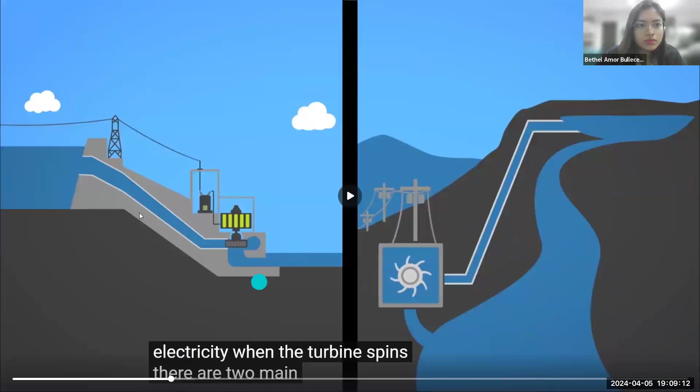Engineer Buliser, does this video have audio? I will let you know.

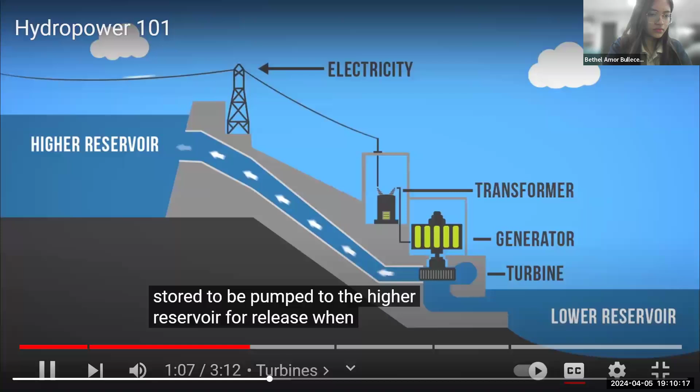Types of hydroelectricity production: dams and run-of-river. Hydro dams utilize the potential energy from dammed water to produce electricity. A dam is a large barrier constructed to raise the level of water and control its flow. The elevation created by the dam creates gravitational force for turning the turbine when water is released. Some dams also contain an additional reservoir at their base where water is stored to be pumped to the higher reservoir for release when electricity is in demand.

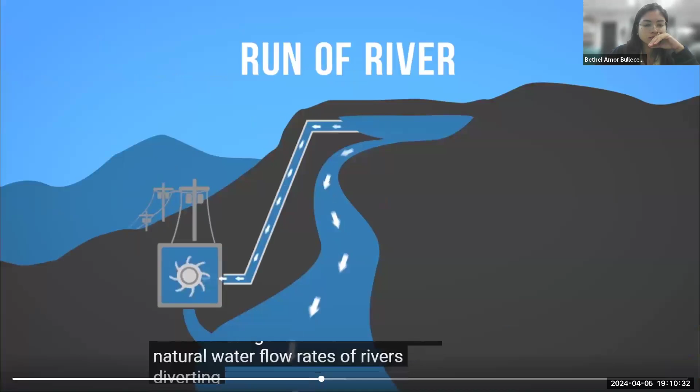This is referred to as pumped storage hydro. The second form of hydroelectricity production is run-of-river hydro. Run-of-river still uses turbines and generators, but relies on natural water flow rates of rivers, diverting just a portion of the water through turbines. Because run-of-river hydro is subject to natural water variability, it is more intermittent than dammed hydro.

There are various sizes of hydro plants that produce electricity: large hydro, greater than 30 megawatts; small hydro, 100 kilowatts to 30 megawatts; and micro hydro, less than 100 kilowatts. The Hoover Dam in the United States is a whopping 2,074 megawatts, which is enough to serve 1.3 million people. Of all renewable energy sources, hydropower holds the largest share of worldwide electricity production.

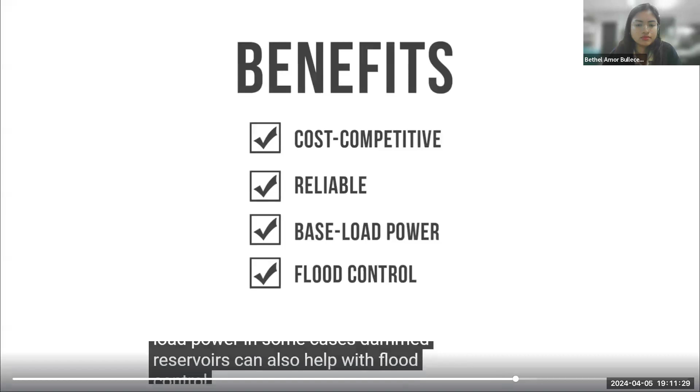Hydropower has several benefits. It is a cost-competitive form of electricity, even though the initial building cost can be high. It is quite reliable compared to other renewable options and pairs well with other sources as it can be used as baseload power. In some cases, dammed reservoirs can also help with flood control and be a reliable water supply for communities. There are also some concerns with hydropower, especially when it comes to large dams.

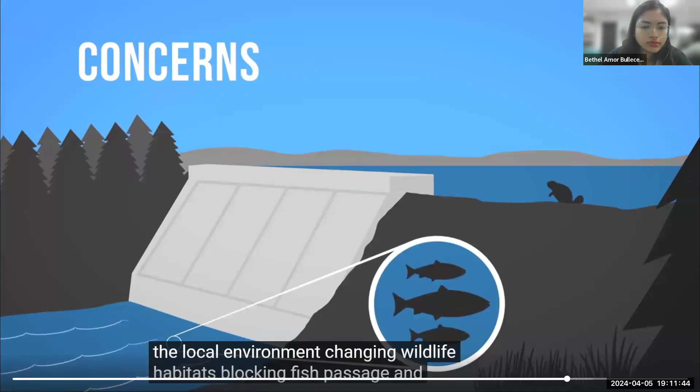Damming a river has a major impact on the local environment, changing wildlife habitats, blocking fish passage, and often forcing people in riverside communities to move out of their homes. In addition, dam failures can be catastrophic, claiming the lives of those living downstream. Hydro plants are also not completely free of greenhouse gas emissions. As with most forms of energy, carbon dioxide emissions happen during construction, particularly due to the large quantities of cement used, and plant matter in the flooded areas makes methane, another greenhouse gas, as it decays underwater.

That's hydropower. So that is the overview about hydroelectric power. So how do we get energy from water?

Hydropower or hydroelectric power is a renewable source of energy that generates power by using a dam or diversion structure to alter the natural flow of a river or body of water. Hydropower relies on the endless, constant recharging system of the water cycle to produce electricity, using water as the fuel, which is not reduced or eliminated in the process.

There are many types of hydropower facilities, though they are all powered by the kinetic energy of the flowing water as it moves downstream. Hydropower utilizes turbines and generators to convert that kinetic energy into electricity, which is then fed into the electric grid to power homes, businesses, and industries.

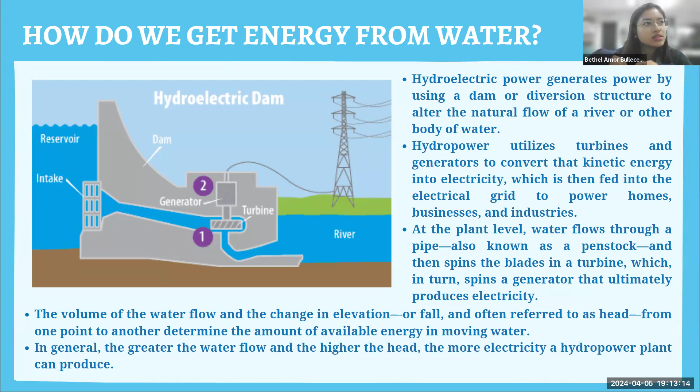Next, I'll be showing you the history of hydroelectric power. Hydropower is a type of renewable energy. It has a long history.

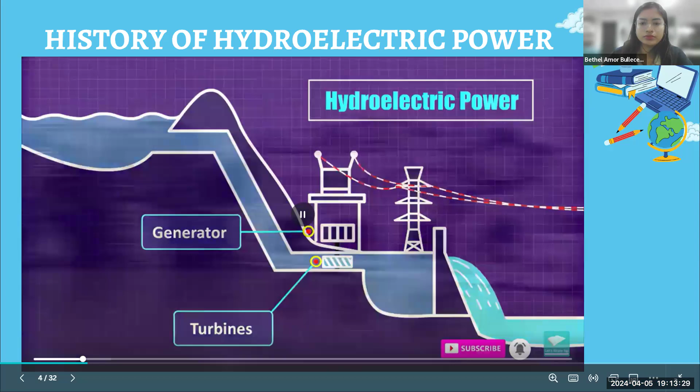Since the early ages, water wheels have helped humans do several works like irrigating crops and grinding grains. Also, it brought revolutionary improvement in paper mills, textile mills, and metallurgy plants.

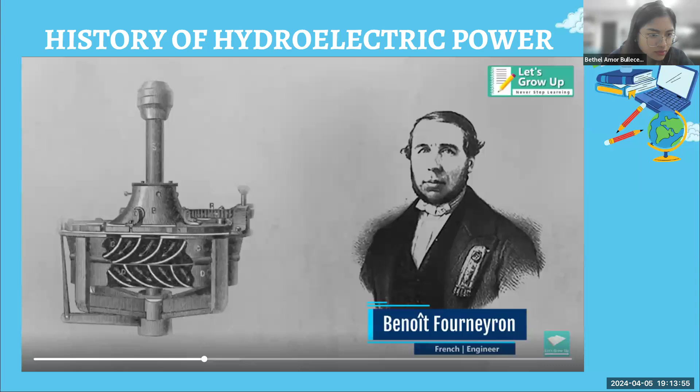Later, the water wheels were replaced by smaller, cheaper, and more efficient water turbines when the French engineer Benoit Fourneyron introduced the first model in 1827. This was the first design of a reaction turbine capable of generating 6 horsepower, or 4.5 kilowatts, with 2 sets of blades arched in opposite directions.

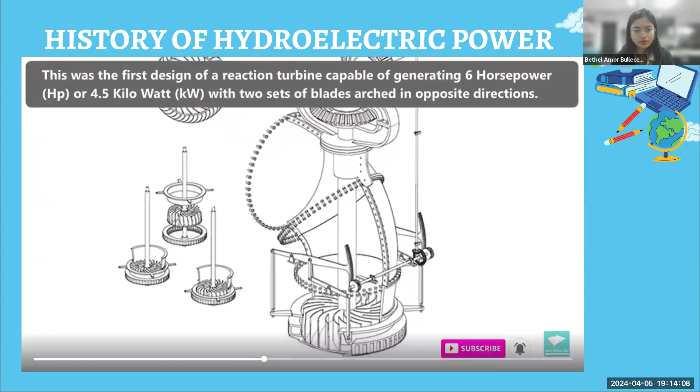Probably the most important year in hydropower history was 1831, when the first electric generator was invented by Michael Faraday. This laid the foundation for us.

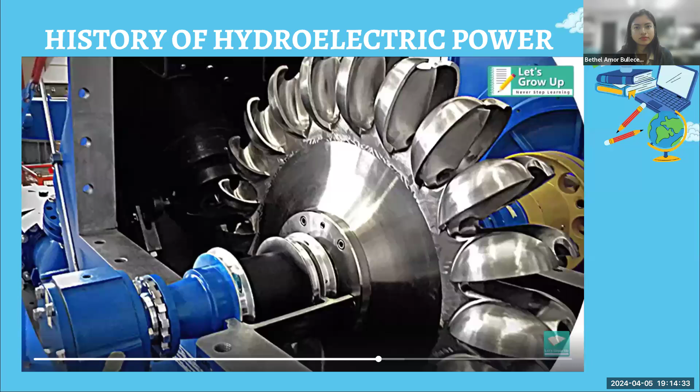After Fourneyron, James Francis created the modern water turbine in 1849. It was called the Francis turbine, and it is the most widely used water turbine till today. The first impulse turbine was created in the 1870s by an American engineer named Lester Allen Pelton. It was named the Pelton wheel after it was patented in 1880.

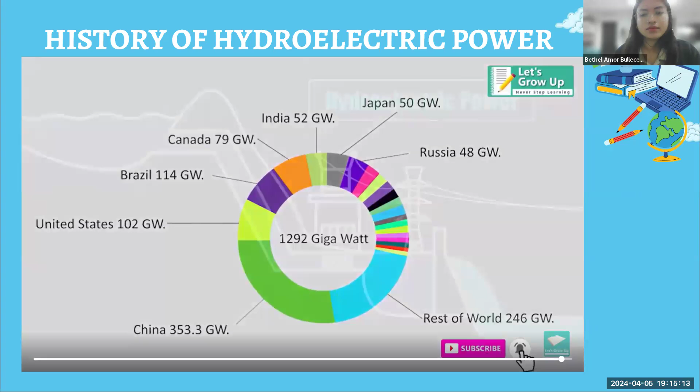The world's first hydroelectric power plant was established in Appleton, Wisconsin, United States, along the Fox River in 1882. After that, over the next century, numerous hydroelectric projects developed all over the world. Currently, the total installed capacity globally is 1292 gigawatts, with China having the highest capacity at 353.3 gigawatts, followed by Brazil at 114 gigawatts. That sums up the history of hydroelectric power.

The water flows through a pipe, which is a penstock. It comes from the intake, where the water enters. Then it flows through the penstock, which creates kinetic energy that drives our turbine. The turbine spins the generator that ultimately produces electricity. So as we've seen, the turbine is connected to the generator, then the transformer, and onward to the transmission line.

So at the plant level, this is the way for the HEPP, or hydroelectric power plant, to generate electricity. Most conventional hydroelectric facilities operate this way, including run-of-the-river systems and pump storage systems.

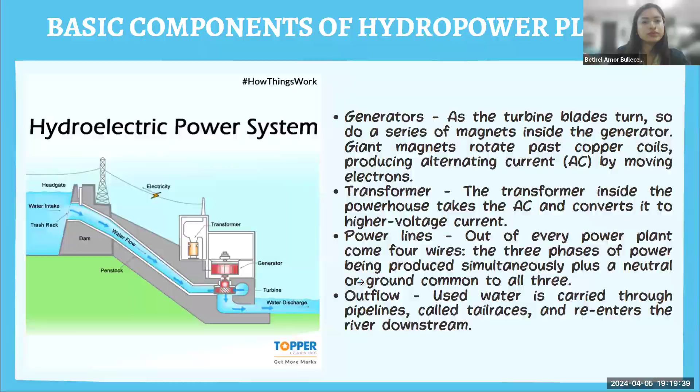Now the different types of water turbines: we have the Francis, the Pelton, and the Kaplan. It depends on the level of the head - the head is usually measured from the turbine up to the water surface of the reservoir. It depends on the distance of the head and also the diameter.

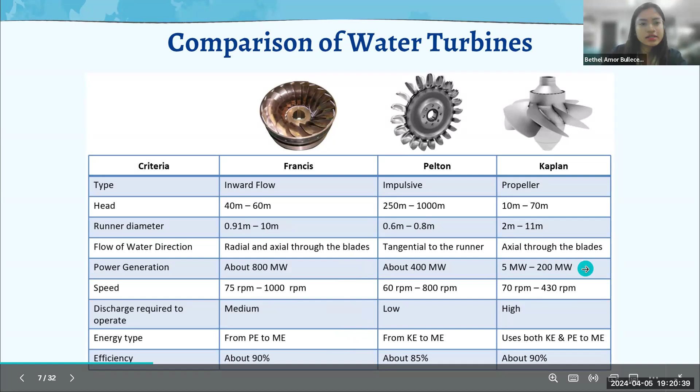For the Francis turbine, flow is radial and axial through the blades. The Pelton is tangential to the runner, and the Kaplan is axial through the blades. It also depends on the power generation, and the speed varies. Efficiency also differs by type - the most efficient are the Francis and the Kaplan, with a percentage of 90%.

Next, we have the classifications of hydroelectric power plants. The hydroelectric power plant is classified by 4 different categories: availability of water flow, water head, major load, and lastly, installed capacity. Under availability of water flow, we have run-of-river without storage, where the flowing water is directly fed to the turbines and the water is not stored.

So generating capacity only depends on the rate of flow of the water, and the plant is placed where there is connectivity directly to the river. So sa river siya gikan. So during rainy season, some water may go to waste due to high flow rate, while during dry season, generating capacity will be low due to low runoff periods or low flow rate. So dili siya, pagka-intermittent gyud.

Then next is the run-of-river with pondage. So the pond or reservoir allows to store water during off-peak hours and uses it during peak hours. So the usefulness of run-of-river plants is increased by pondage. So ang pondage, it utilizes the river's water for electricity generation, thus wastewater is minimal compared to a plant without pondage. So due to the presence of pondage, tailrace conditions should be such that exit water would not cause flooding.

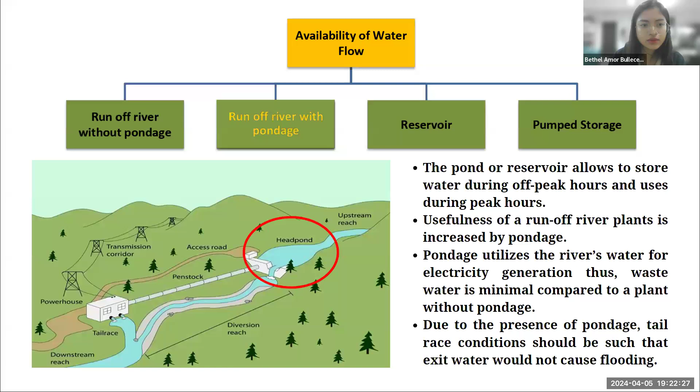So next is ang reservoir. So water is stored behind a dam which is available throughout the year. So it can be used as a base load plant. So usually sa Philippines, inani usually ang atua, and most hydroelectric power plants in the world are reservoir or storage type plants. So the larger the dam or storage facility, the larger its generating capacity. So example siya ang Three Gorges Dam sa China which generates 22,500 megawatts.

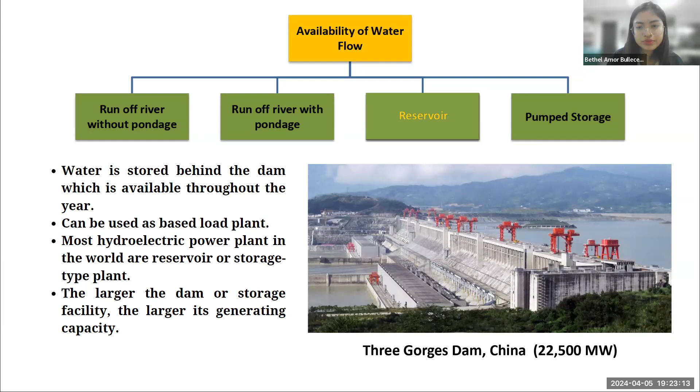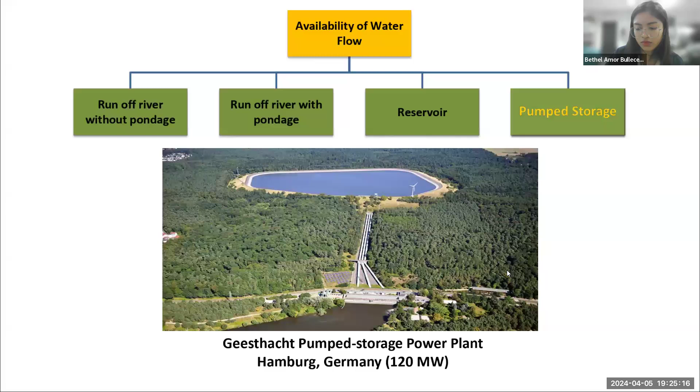So next we have the water head. So the water head we have low, medium, and high. So the low water head has head differences of less than 30 meters. So runoff river systems are generally used on this type of head where no surge tank is required, as the power plant is typically located near the dam. So low head systems transport water in large volume and thus require large diameter and short length of pipes, large turbines, and low-speed generators.

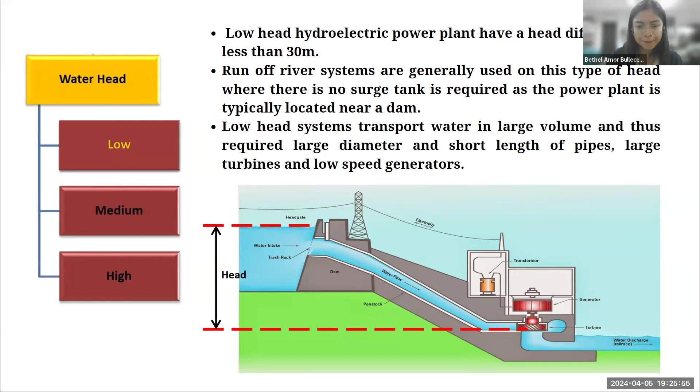Next is the medium water head. So it has a head difference between 30 to 100 meters. So the water is mainly stored in the forebay, which goes to the turbine through the penstock. Then the forebay serves as a surge tank where the water is usually carried in an open channel from the main reservoir.

Then we have the high water head. So 100 meters and above ang head. High head systems transport water at smaller volume from a high elevation reservoir and thus require small diameter with long length of penstock, smaller turbines, and high-speed generators. So a surge tank may be needed on this type of head to serve as a ready reservoir in case of sudden change in demand and reduce the severity of the water hammer effect on the penstock. So generally, the large hydroelectric power plants are either medium or high head.

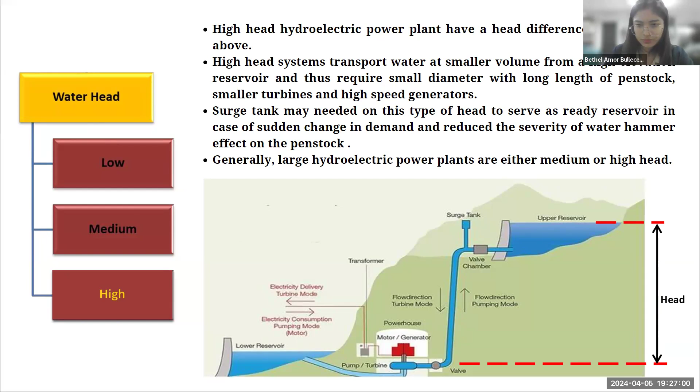So we have two natures of load, the base and the peak. So the base provides continuous supply of electricity throughout the year with some minimum power generation requirement. Due to the low generation cost of hydroelectric power plants, they are generally considered as must-run units. So hydroelectric power plants with continuous flow of water or a large storage can be used as base load plants.

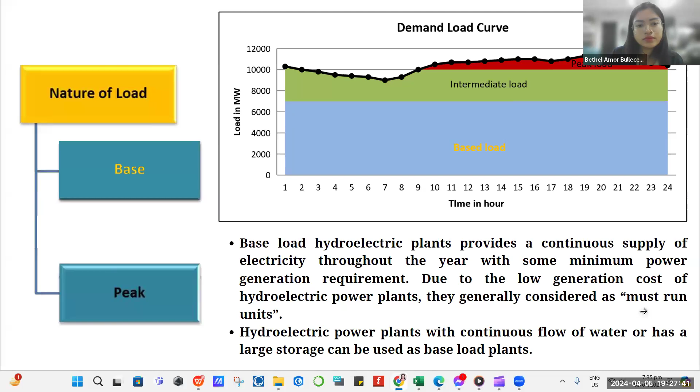Next we have the peak. Peak load hydroelectric plants are used to supply the grid during peak hours, only during peak hours, or the top portion of the load curve. So that's the peak load, only at certain hours, a certain time when the demand for electricity is at peak. But the base load is the demand over the 24 hours, the electricity we need within the 24 hours. It's continuous, not intermittent.

So run-of-river plants with pondage and pumped storage type can be considered as peak load plants, like the pump storage earlier. Usually peak load plants have higher generation cost compared to base load plants.

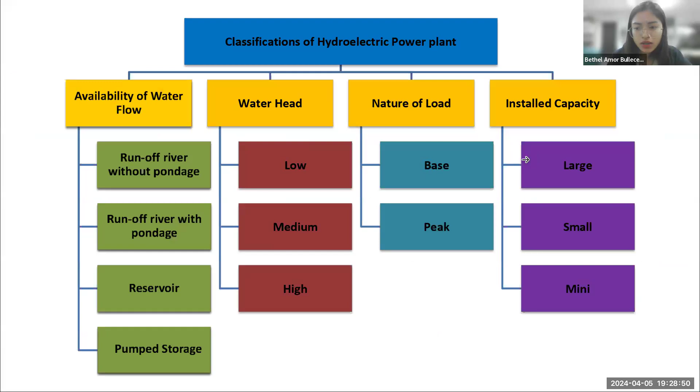Next we have installed capacity. We have large, small, and mini. For the large capacity, exceeding 100 megawatts in plant capacity and usually feeding into a large grid. Next we have small, typically ranging from 15 to 100 megawatts in plant capacity and usually feeding into a subgrid. They are usually called embedded generators.

And lastly, the mini has a plant capacity of 100 kilowatts to below 15 megawatts and usually feeds into a subgrid or isolated grid. It provides electricity to small communities or remote areas away from the grid. They are usually called distributed energy resources.

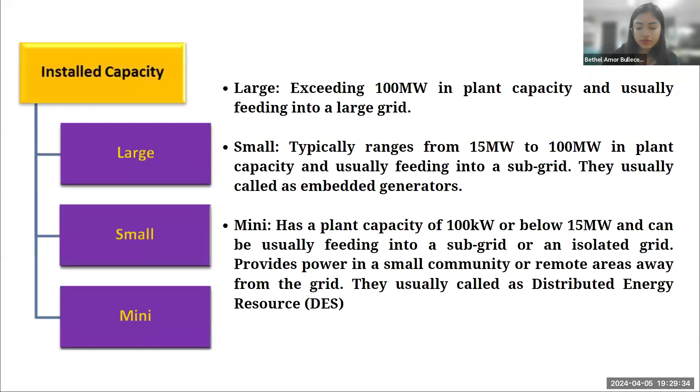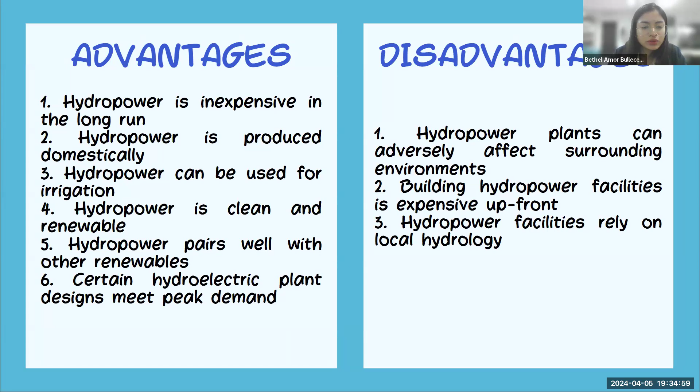So here are some of the hydroelectric technologies. There are many of them now, but I will just show you three.

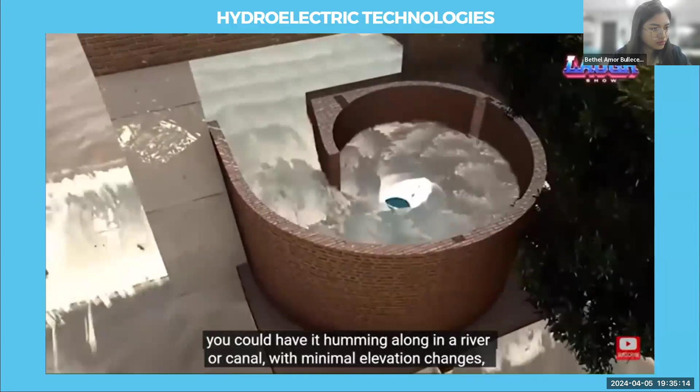Belgian company, shaking up the hydroelectric power scene. Their game-changing turbulent turbine, a marvel of modern design, is more affordable and economical than traditional powerhouses. Just picture it. You could have it humming along in a river or canal with minimal elevation changes in a week's time. Day or night, rain or shine, it's generating electricity for you.

Here's how it works. This smart turbine creates a swirling vortex in a concrete basin, turning water flow into spinning energy. Depending on the water's flow rate, it can generate up to a whopping 70 kilowatts. Enough juice to power 6 or 7 households. And the best part, it's environmentally friendly. The design ensures our aquatic friends remain unharmed, and its impressive lifespan extends beyond 100 years. Truly, a step forward in renewable energy.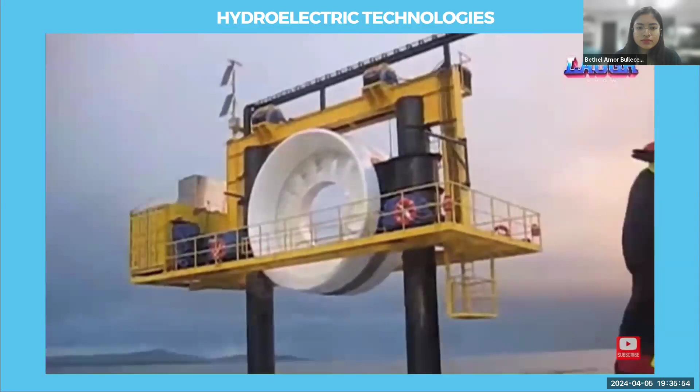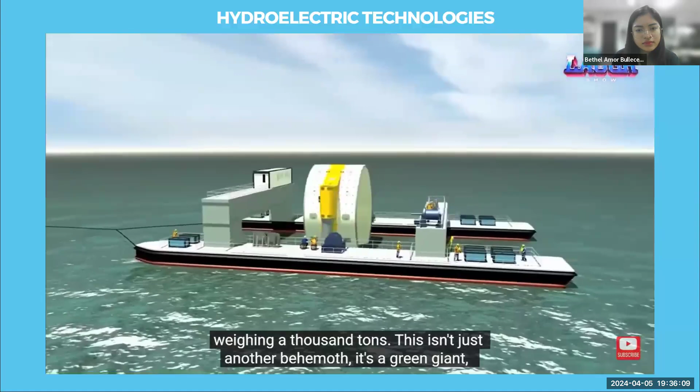Open Hydro. Continuing our journey into renewable energy, gentlemen, we set sail to Open Hydro, North America's largest tidal power plant off Canada's coast. Imagine a structure towering 5 stories high, weighing 1,000 tons. This isn't just another behemoth, it's a green giant, generating a staggering 16 megawatts of electricity, enough to power a small town. This marvel of engineering is the product of Irish company Open Hydro and Canada's Emera, and it's been harnessing the power of the sea since November 2016.

Now, get this. Open Hydro features 2 turbines, each 53 meters in diameter, anchored by cables a solid 120 meters long. This means, from turbulence vortex to Open Hydro's tidal prowess, we can power about 1,000 homes without emitting a trace of greenhouse gas.

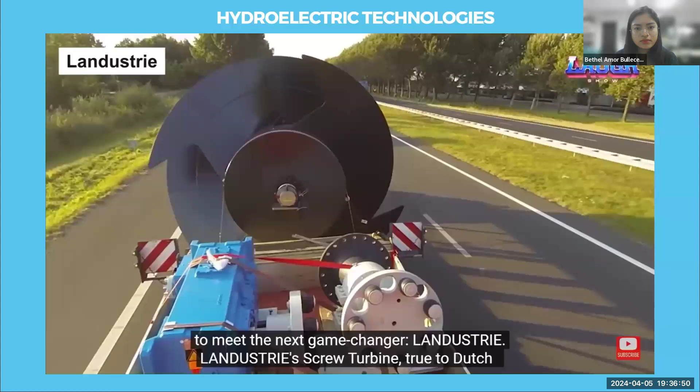Landustrie. Now, we journey to the Netherlands to meet the next game changer, Landustrie. Landustrie Screw Turbine, true to Dutch expertise in water management, turns canal height differences into electricity. It's a marvel, generating power from just a 1 meter height difference and a water flow of 500 liters per second. Just like its predecessors, the Landustrie Screw Turbine is compact, easy to install, and kind to your wallet with its low maintenance costs. It's resilient, withstanding harsh canal conditions and ice while ensuring the safety of our aquatic friends.

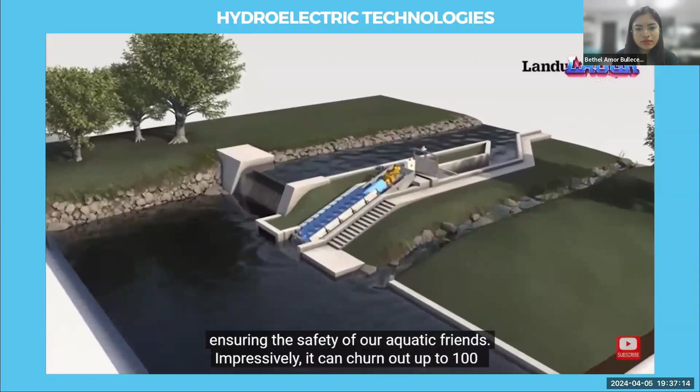Impressively, it can churn out up to 100 kilowatts of electricity continuously and remains a reliable source of energy even during periods of low water flow. Best of all, it's a zero-emission solution.

So those are just some of the technologies invented by the researchers and engineers in the different parts of the world. So we have cumulative hydropower capacity worldwide. In 2022, these are the major countries that have contributed to the hydropower capacity. We have China as the highest. China generates 414.8 gigawatts of hydroelectricity, followed by Brazil, which is 109.8 gigawatts.

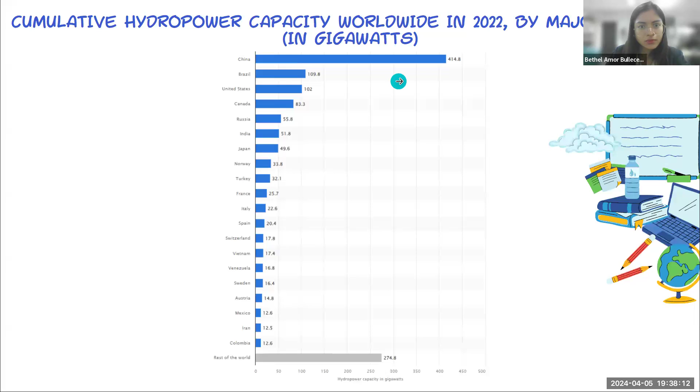So Philippines energy mix by 2022. Luzon has 6.6% of gross generation from hydroelectric, while Visayas has 0.24% share of hydroelectric generation, and Mindanao has 31.07% hydroelectricity generation. So Mindanao is really big, we have lots of hydroelectricity generation. So overall, in the Philippines, the energy percent share for hydroelectricity is 9.04%.

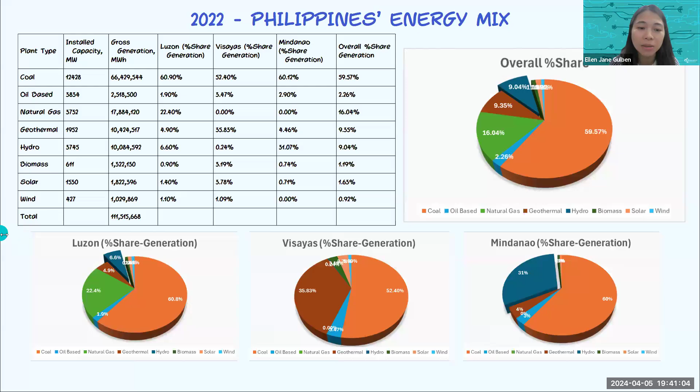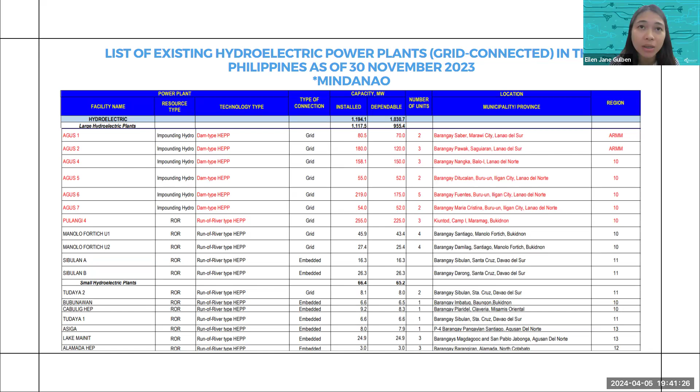So, we are considering them as base load or a must-run unit, as what our presenter has said earlier. It's a must-run unit since it's very cheap type of electricity. So we considered it as base load, and since it is base load because it provides stable supply. If it says that it will provide you 65 megawatts, it will provide you 65 megawatts.

Unlike solar that depends on the sun, which is erratic because it is dependent on weather conditions. So we can't get the amount, the peak load that solar can provide. Unlike our hydro. So it is considered base load. But hydro's generation unit is also able to follow peak load demands, since its ramping is fast.

So if you want an additional 10 megawatts in at least 5 minutes, the hydropower plant can provide you that, or if you want it lowered, they can also lower down their generation. So it can be considered a peak load power plant. So it can be base load, it can be peak load.

So, for those who were in my undergrad class, you have your laboratory 1, which is load profiling. You have 3 types or 3 categories of loading in your power plant. Please, you can resubmit your laboratory 1. Find power plants that are base load, intermediate, and peak load power plants. So you may resubmit your laboratory 1, class.

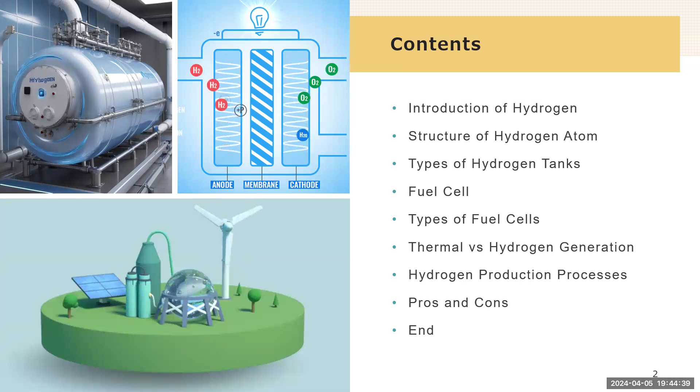So for the discovery of hydrogen, in 1766, Henry Cavendish was the first to recognize hydrogen gas as a discrete substance by identifying the gas from metal acid reaction as flammable air. Then in 1781, he was the first person to find that the gas produces water when burned, and this was a key experiment in disproving the Aristotelian theory of the four elements.

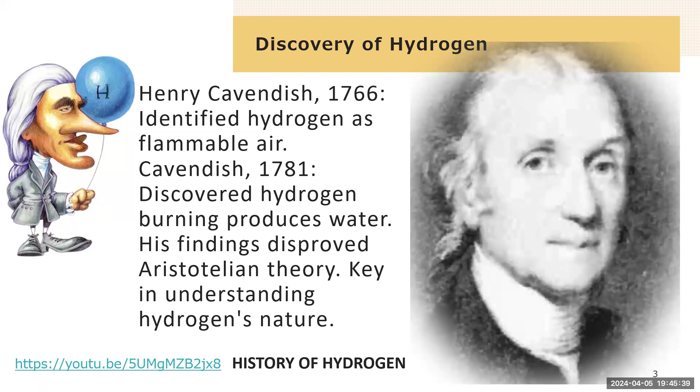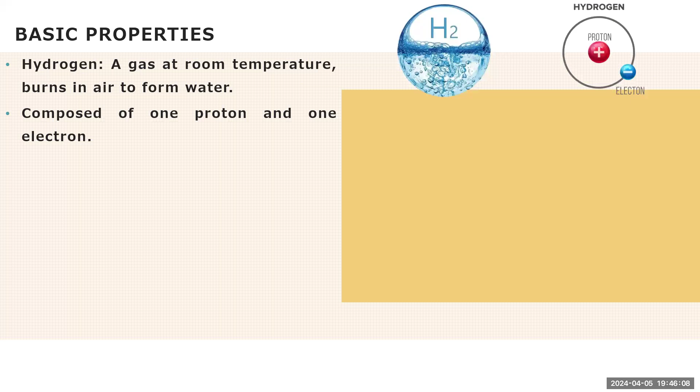So for the basic properties, hydrogen is a chemical element that exists as a gas at room temperature. When hydrogen gas burns in air, it forms water, and hydrogen gas has the smallest atoms of any element, and a hydrogen atom contains only one proton and one electron. So the proton is the center or nucleus of the hydrogen atom, and the electron travels around the nucleus.

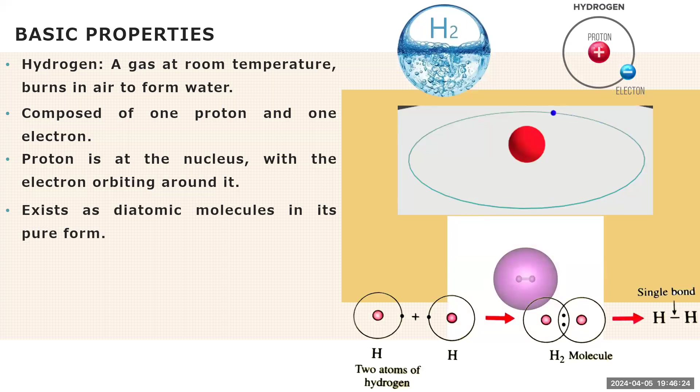And pure hydrogen exists as a hydrogen gas, in which pairs of hydrogen atoms bond together to make molecules, and hydrogen is the first element in the periodic table with the atomic mass and atomic number of 1. So hydrogen, which has the chemical symbol of H, is the smallest and most common element in the universe.

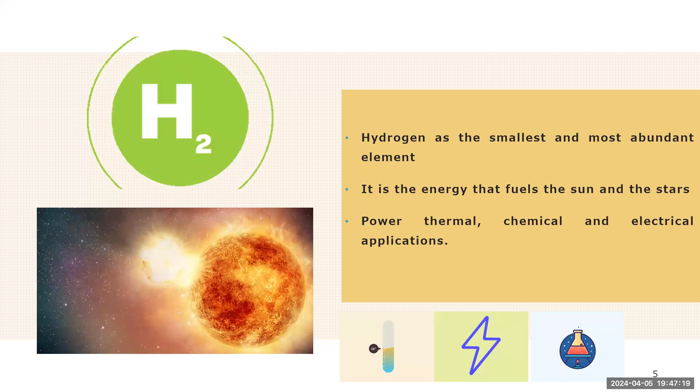It is the energy that fuels the sun and the stars, and hydrogen is a versatile energy carrier. So you can power almost anything with hydrogen with numerous thermal, chemical, and electrical applications. In contrast to some other forms of energy such as solar or wind, it's not all about harnessing what's already there. The challenge of hydrogen is we need to make hydrogen energy.

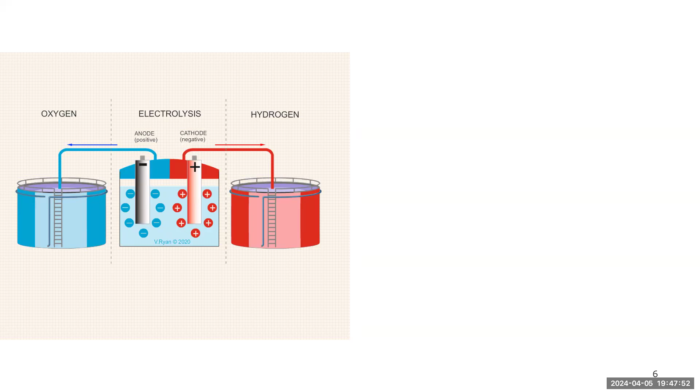So hydrogen can be produced from a variety of resources. One method is electrolysis, the process of passing an electrical current through water, H2O, to split it into its separate hydrogen and oxygen atoms. After the hydrogen gas has been separated from oxygen gas, it is purified to remove traces of oxygen and water, and it is then compressed and safely stored. The separated oxygen is typically released into the atmosphere or captured and stored for further uses.

So, types of hydrogen tanks. The use of hydrogen as a fuel source is becoming increasingly popular. So as we shift towards renewable energy sources, the safe and efficient storage of hydrogen is a major challenge. As it needs to be stored under high pressure, we will explore the different types of tanks used to store hydrogen under pressure.

So there are 5 types of gas tanks that can be used for both stationary and mobile applications to store hydrogen. For type 1, this is the most common gas tank, which is a simple cylinder made of steel. The operating pressure is from 200 to 300 bar, and it is typically used for industrial applications. The density of such a type 1 storage is around 15 grams per liter.

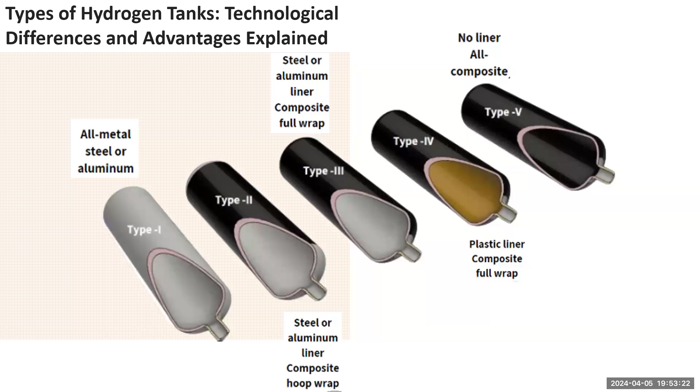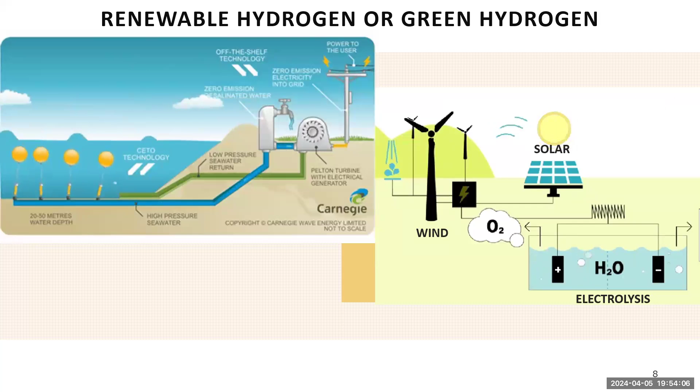Hydrogen produced by electrolysis using renewable energy like solar or wind, as well as sustainable water sources like desalination, is referred to as renewable hydrogen or green hydrogen, as it does not emit greenhouse gases when produced. Hydrogen is the lightest element. It is 14 times lighter than air. Because of its low density, it is difficult to transport as a gas. Instead, it needs to be liquefied or converted into a denser form such as ammonia for transportation.

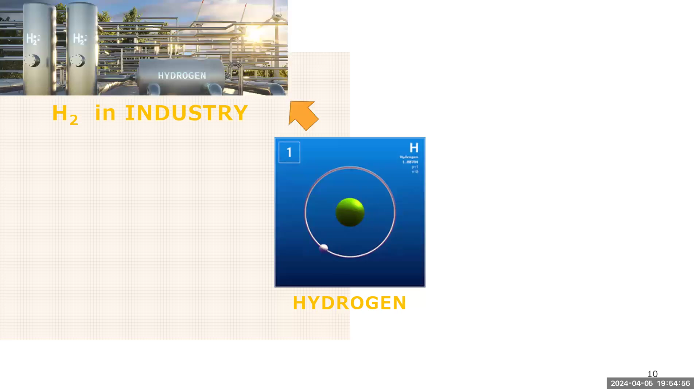So because of its low density, it is difficult to transport as gas, like I said. So it is liquefied or converted to ammonia, and after that, it can be transported. Hydrogen is one of the oldest and most commonly used gases in industry and manufacturing globally. It can be used to fuel ships or heavy vehicles like trucks and buses, or as raw material for production of manufactured products like fertilizers and steel.

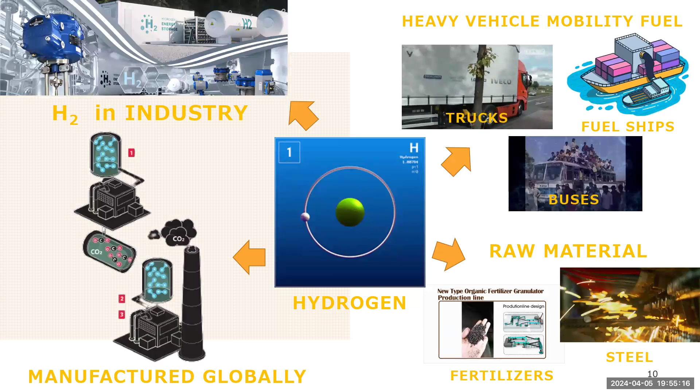In the electrical circuit, the electrons released at the anode flow through an external circuit, creating an electrical current, and a proton exchange membrane allows protons to pass through while blocking electrons, ensuring that the electrical current flows through the external circuit rather than short circuiting within the cell. The oxygen from the surrounding air is supplied to the cathode.

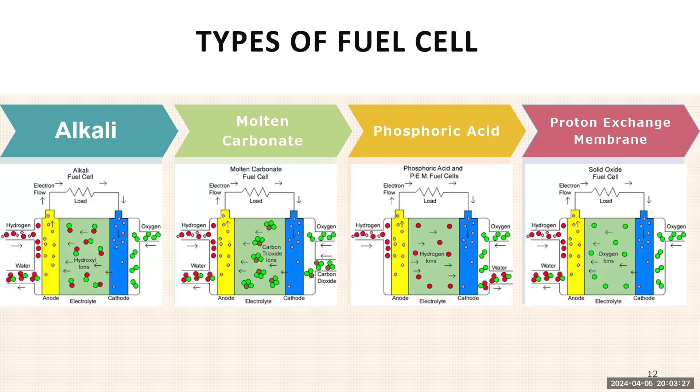For the electrolyte, solid electrolyte or zirconia facilitates ion conduction, and oxygen reduction occurs at the cathode, with oxygen from the air supplied to the cathode.

Next is the comparison of thermal generated energy versus hydrogen energy. For thermal generated energy, the fuel source is diesel or petrol, hydrocarbon-based fuels, and the chemical energy is stored in the hydrocarbon molecules.

Then next is thermal energy, or combustion. The hydrocarbons are burned in an engine, producing heat, and the mechanical energy, or piston energy, is expanding gases moving the pistons. Then next is electric energy, the generator. The mechanical energy drives a generator producing electricity. The thermal generated energy outputs not only electricity, but also noise, carbon dioxide, nitrogen oxides, and fine dust.

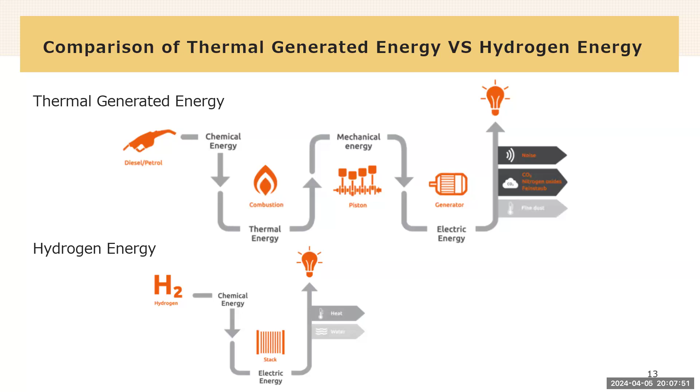For hydrogen production pathways, as for the energy input: ethanol, a renewable alcohol-based fuel; biomass, organic matter used as a renewable energy source; and organic waste, biodegradable materials such as food scraps, yard waste, and sewage sludge.

Next is crude oil, a fossil fuel extracted from underground reservoirs, and natural gas, a fossil fuel primarily composed of methane. The last one is coal, a fossil fuel formed from plant matter over millions of years.

For processing, regardless of the energy input, the reformer process involves feeding the input fuel into a reformer reactor along with steam at high temperature in the presence of a catalyst. The reforming reactions decompose the input fuel into hydrogen gas, carbon monoxide, and carbon dioxide through steam reforming or partial oxidation.

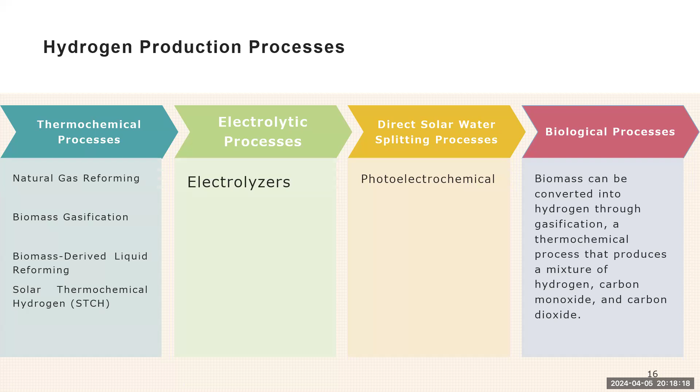For the thermochemical process, natural gas reforming, the pressure swing adsorption or PSA process is based on the phenomenon that under high pressure gases tend to be adsorbed onto solid surfaces, for example, to be absorbed.

Steam methane reforming, or SMR: methane reacts with steam at high temperature to produce carbon monoxide and hydrogen gas. This reaction is the primary method for industrial hydrogen production from natural gas.

Then the water gas shift reaction: in the forward reaction, carbon monoxide reacts with steam to produce carbon dioxide and additionally hydrogen gas.

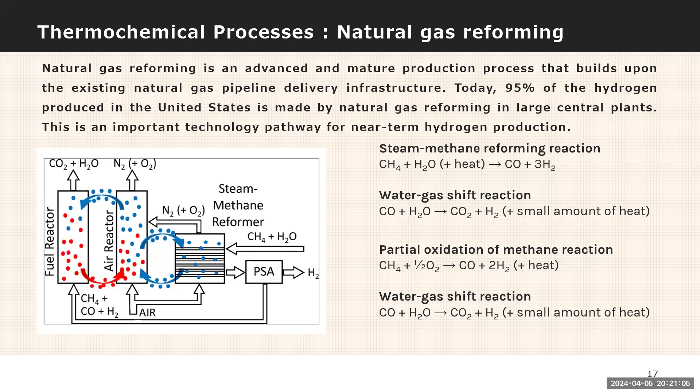The next thermochemical process is biomass gasification, a well-established method that converts biomass into hydrogen and other products through a controlled process involving heat, steam, and oxygen without combustion. A simplified example reaction for biomass gasification involves glucose as a surrogate for cellulose, a major component of biomass.

This reaction demonstrates the conversion of glucose, representing biomass, with oxygen and steam to produce carbon monoxide, carbon dioxide, and hydrogen gas, along with other byproducts.

The water gas shift reaction plays a role in biomass gasification. In this reaction, carbon monoxide reacts with steam to produce carbon dioxide and additionally hydrogen gas, accompanied by a small amount of heat release. This reaction exemplifies the fundamental process involved in biomass gasification, enabling the sustainable production of hydrogen and other valuable products from renewable biomass resources.

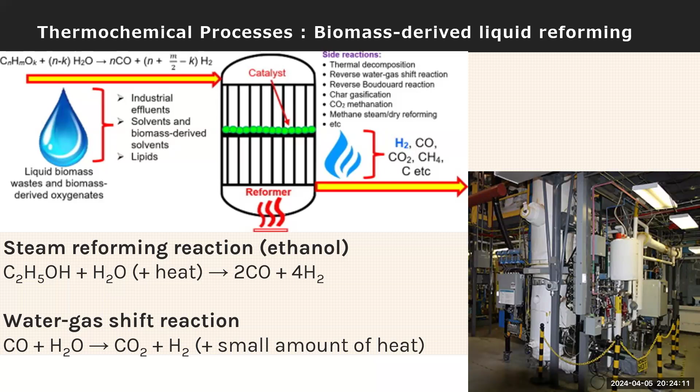Ethanol reacts with steam at high temperature to produce carbon monoxide and hydrogen gas. Then carbon monoxide reacts with steam to form carbon dioxide and additionally hydrogen gas, with a small amount of heat release. These reactions demonstrate how liquids derived from biomass can be reformed to produce hydrogen, offering a renewable and sustainable pathway for hydrogen production.

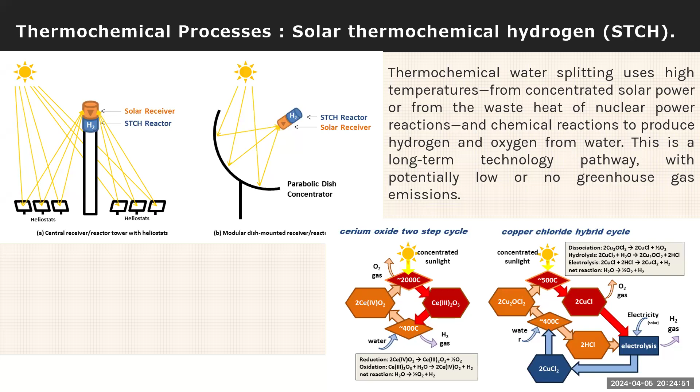Then the thermochemical process of solar thermochemical hydrogen, also known as water splitting, is a technology pathway that utilizes high temperatures sourced from concentrated solar power or the waste heat of nuclear power reactions, along with chemical reactions, to produce hydrogen and oxygen from water. This approach offers a long-term solution for hydrogen production with the potential for low or no greenhouse gas emissions.

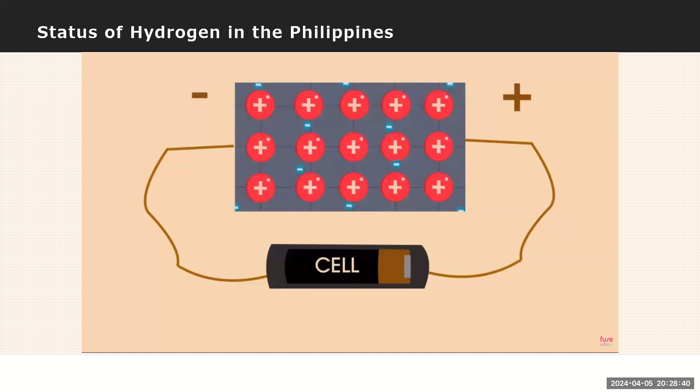Structures, we know that electrons in a metal aren't bound to particular atoms. They form a sea of electrons that can move easily if a potential difference or a voltage is applied across it. This could be from an electrical cell or a battery. The electrons will begin to drift towards the positive terminal of the battery, and this is what happens when current flows. Current is the movement of charge, in this case, electrons.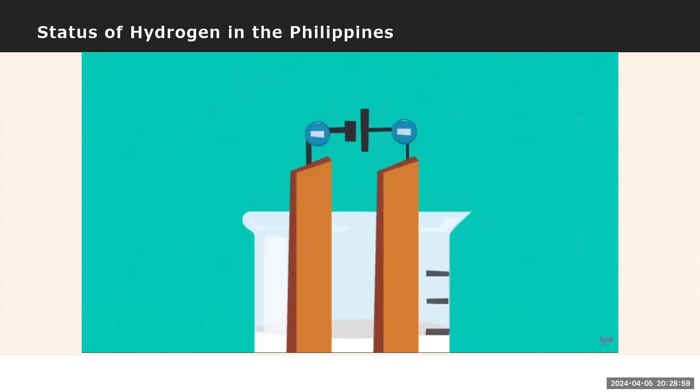Now, let's go back to our molten sodium chloride. We've added our copper wires, let's call them electrodes, and now we'll connect these to an electrical cell. The electrons will start to flow in the wires, and this will cause one electrode to become positively charged and the other negatively charged. This has an immediate knock-on effect in the molten sodium chloride, which you'll remember is a mixture of sodium cations and chloride anions.

Anything positively charged in the liquid, in this case the sodium ions, is going to be attracted to the negative electrode. And anything negatively charged, in this case the chloride ions, is going to be attracted to the positive electrode. This is because opposite electrical charges attract. When the ions meet the electrodes, electron exchange happens. This triggers a chemical reaction.

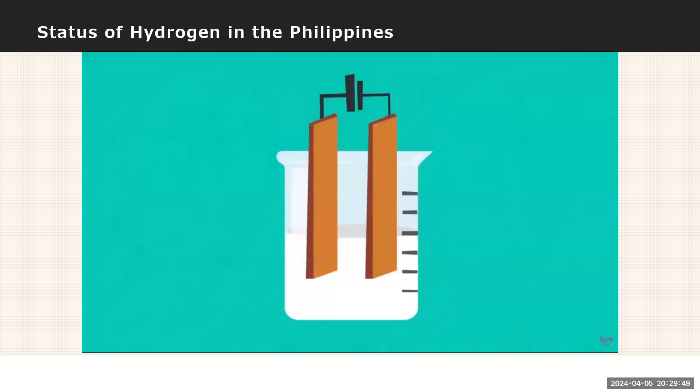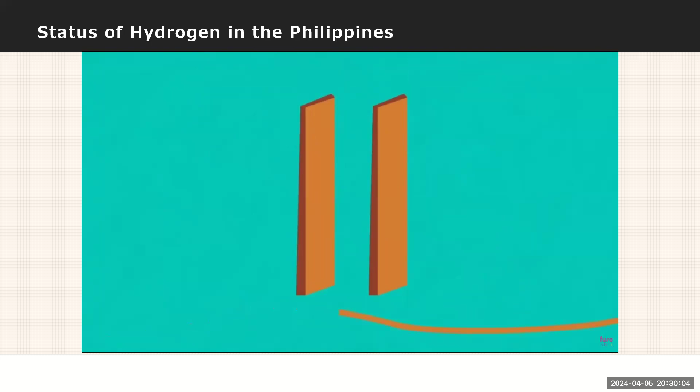Solids can form, gases can be given off, and new solutions can be left behind. It all depends on the liquid and what material the electrodes are made from. There is more detail about this process in our lesson, Interpreting Electrode Equations. There are special names for the electrodes, which are usually metal plates with a larger surface area than a piece of wire. The positive electrode is called the anode. It attracts anions. And the negative electrode is called the cathode.

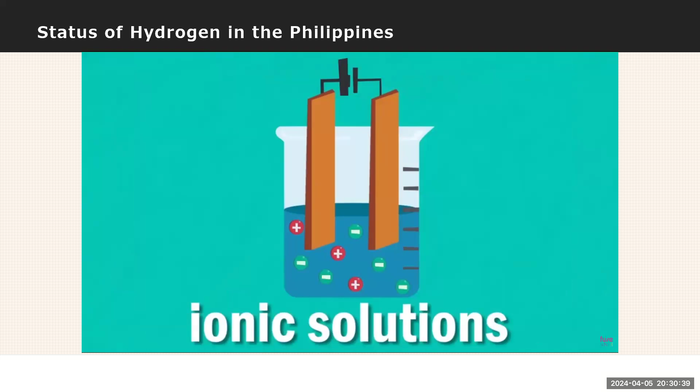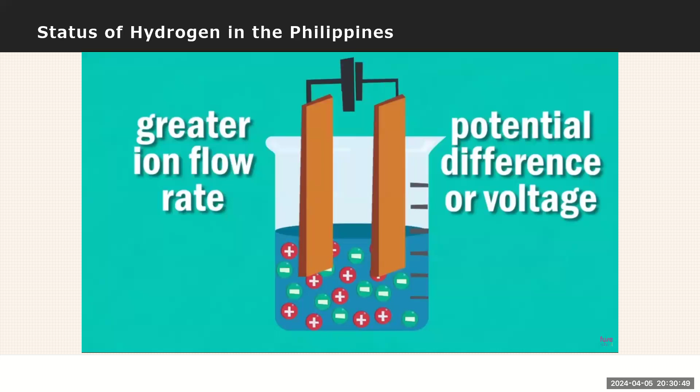It attracts cations. The liquid is effectively conducting electrical current. The only difference is that the charge carriers in the liquid, in other words, the charged particles that are moving, are ions. If a liquid has free-moving ions and can conduct like this, it is called an electrolyte. Remember that electrolysis can also take place in ionic solutions as well as molten compounds. The more concentrated that solution, the greater the ion flow rate. Ion flow rate can also be increased by increasing the potential difference or voltage across the cell.

We'll be studying several examples of electrolysis in more detail in other lessons. For the time being, though, here is a summary of the key ideas about electrolysis. Electrolysis is the flow of electrical current in a conducting solution or molten liquid that causes chemical changes. The conducting liquid is called an electrolyte and has free moving ions. The conducting plates, bars, or wires inserted into an electrolyte are called electrodes.

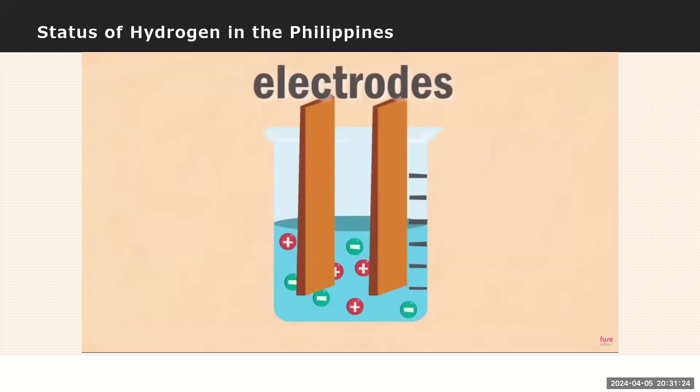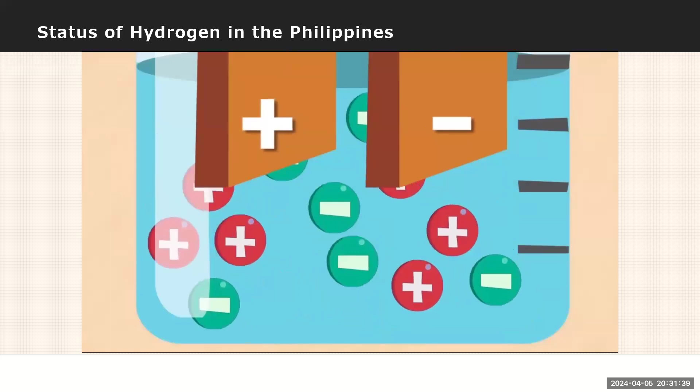Positive ions are called cations and are attracted to the cathode. Negative ions are called anions and are attracted to the anode. When current flows in an electrolyte, it is the ions that move and carry the electrical charge. When current flows in the electrodes or wires, it is the electrons that move. So that was about the electrolysis.

Then next is the direct solar water splitting process, or the photoelectrochemical water splitting. So the semiconductor photoelectrode water splitting employs a photoelectrode typically made of a semiconductor material such as silicon, titanium dioxide, or gallium arsenide. So this photoelectrode absorbs photons from sunlight, generating electron-hole pairs within the material.

So when photons of sunlight strike the semiconductor material, they excite electrons from the valence band to the conduction band, creating electron-hole pairs. So this process is facilitated by the semiconductor's band gap energy, which determines the wavelength of light that can be absorbed. So the excited electrons and holes generated within the semiconductor are separated due to the internal electric field of the material.

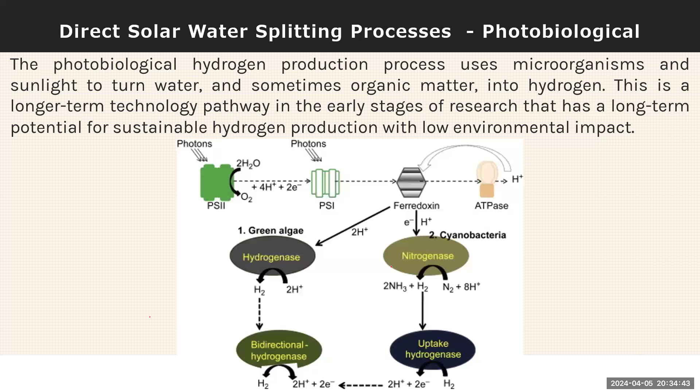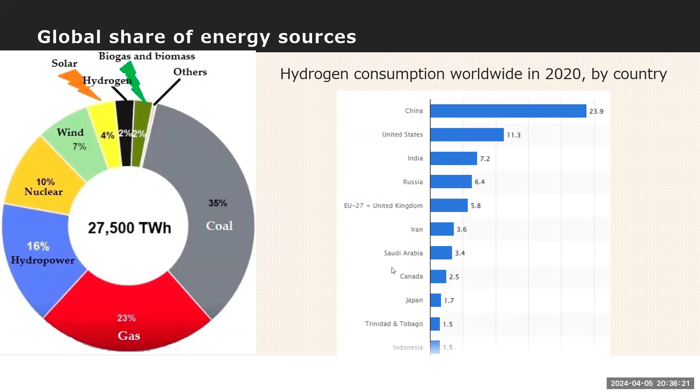So the Philippine government, prompted by a circular from the Department of Energy, DOE, is actively exploring hydrogen for power generation. DOE circular number 2024-01-001, signed by Energy Secretary Raphael Lotilla, offers incentives for hydrogen energy projects aimed at producing green hydrogen for power generation. The circular provides income tax holidays and exemption from duties on renewable energy machinery.

Local hydrogen occurring naturally in geologic formations is being considered for power generation alongside natural gas to reduce emissions. The National Power Corp is leading feasibility studies on using green hydrogen and fuel cell technologies in rural areas. This collaboration aims to promote clean and affordable energy, potentially replacing diesel-powered systems.

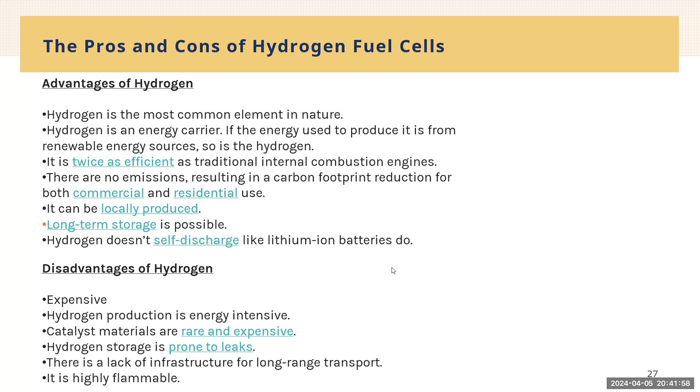As for the disadvantages of hydrogen, it is expensive, the production is energy intensive, the catalyst materials are rare and expensive, hydrogen storage is prone to leaks, there is a lack of infrastructure for long-range transport, and it is highly flammable.

So, hydrogen holds immense potential as a renewable energy source to support the transition to a low-carbon economy with continued technological advancement and supportive policies. Hydrogen could play a crucial role in decarbonizing energy systems and addressing global climate change challenges. However, realizing the full potential of hydrogen will require concerted efforts from governments, industry stakeholders, and research institutions to overcome technical, economic, and regulatory barriers.

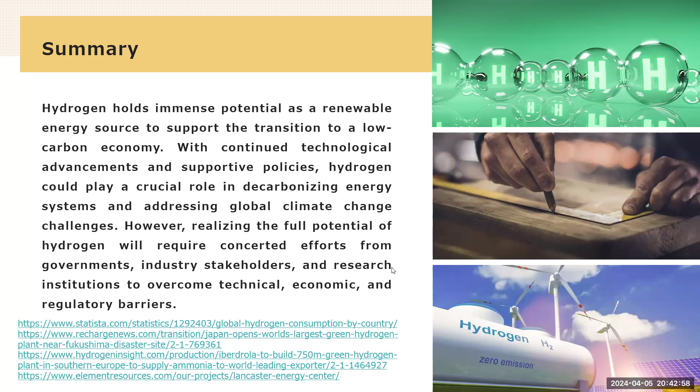And that would be all. These are my references for tonight's presentation. Thank you.

Thank you, Engineer Lenas, for your presentation. Does anyone have a question for our presenter? If there's none, I guess we can end our class for tonight. But before we end, let's have attendance now. Can everyone open their cameras, please? Okay, let me have a picture. 1, 2, 3, smile. Okay, thank you everyone for joining us tonight. We can end our class here.